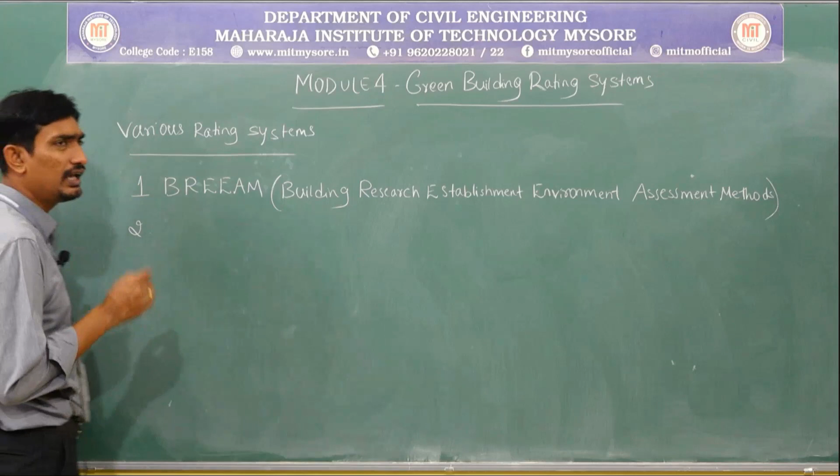Next is the very widely used assessment system in green building, that is LEED. LEED means Leadership in Energy and Environmental Design. So this is the second rating system we are going to follow.

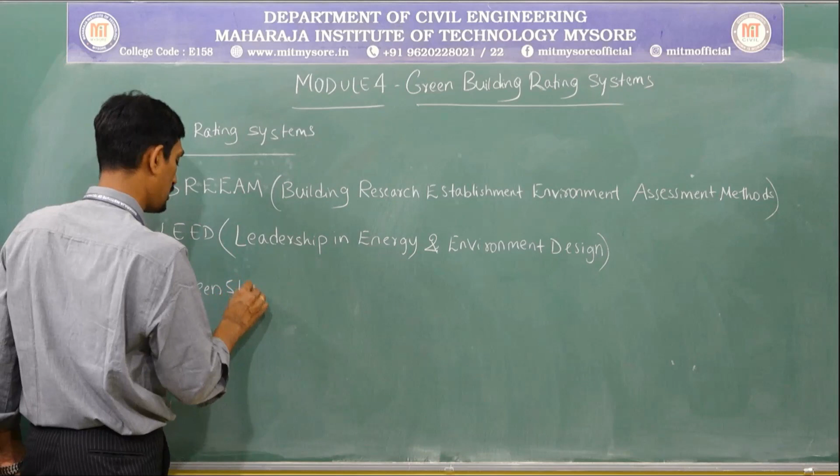Next is Green Star. So this is one more rating system we are going to follow.

These systems are globally used in the green building rating system. Particularly if I come to the Indian context, the rating system used is IGBC, that is Indian Green Building Council. This is the popularly used assessment method in India, and so many strategies and categories have been derived from LEED.

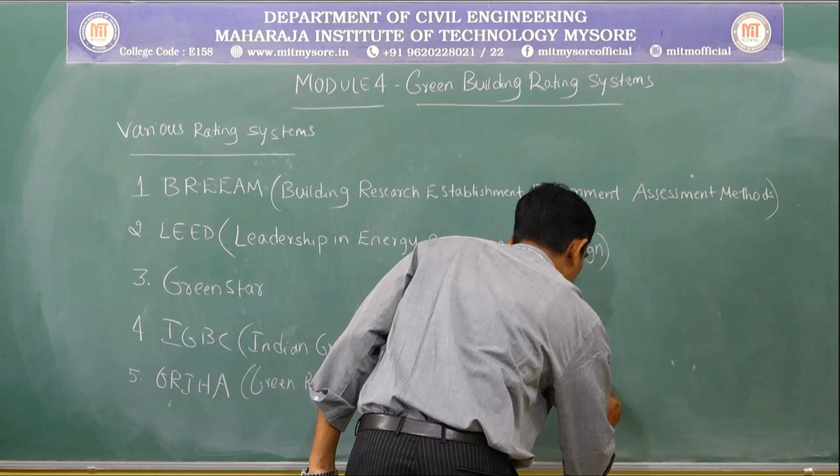The next one is GRIHA, one more widely used assessment, that is Green Rating for Integrated Habitat Assessment. So these are the systems we are going to discuss.

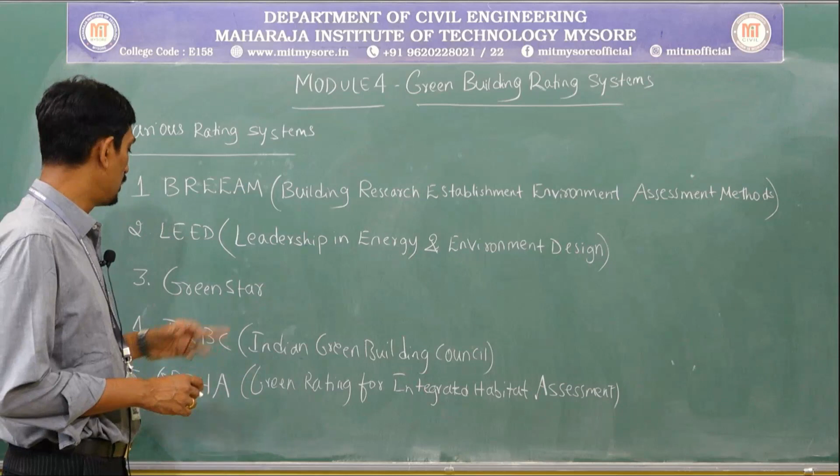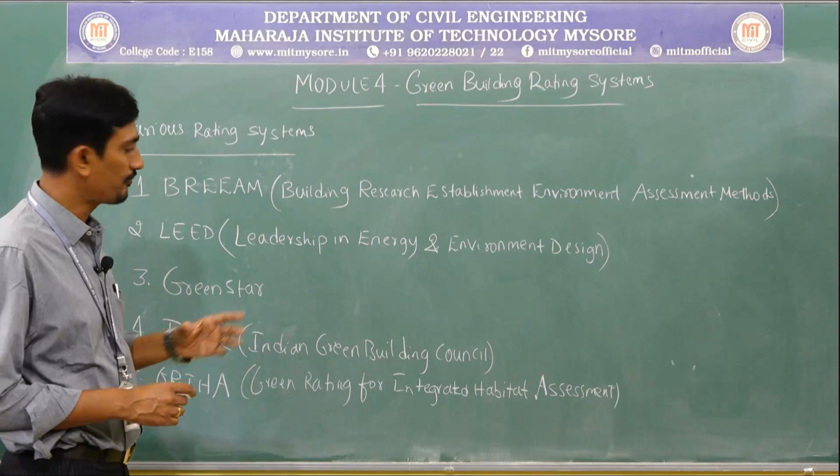The first one is BREEAM, that is Building Research Establishment Environment Assessment Methods. The next is LEED, very popularly used globally, in most countries - Leadership in Energy and Environmental Design, the second rating system. And the third rating system is Green Star, used in some typical countries. So these three are used globally.

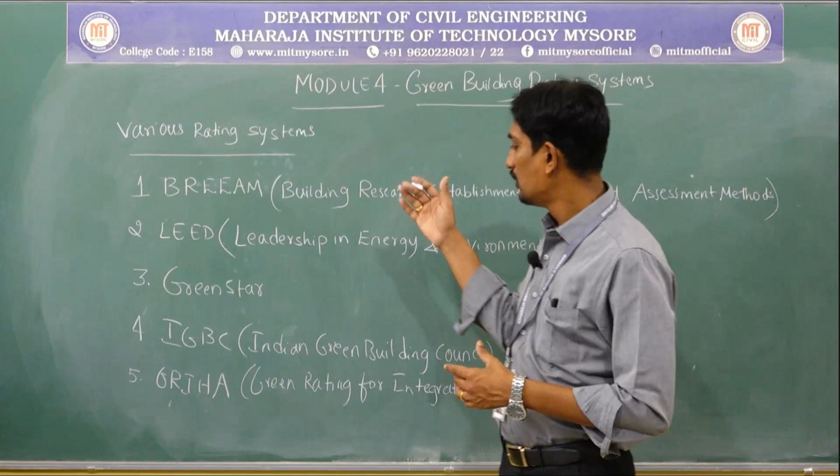Coming to the Indian context, the widely used green building rating system is Indian Green Building Council, that is IGBC. Apart from this, the one more rating system we are going to use is Green Rating for Integrated Habitat Assessment, GRIHA. So these are the five rating systems I am going to discuss.

In this section we will start one by one, discussing the principles followed by each rating system. Apart from these five rating systems, there are other systems used in other countries, like CASBEE. This is one rating system used in some other country. In Japan also they use some other standards, Japan standards. So like this, various countries have adopted various rating systems.

The categories used to classify and rate green buildings also slightly change from one rating system to another. But in general, all the rating systems follow the same categories - water efficiency, energy efficiency, ecology, environment, waste management, and so on. But they have been bifurcated with respect to their countries so that they can rate the green building accordingly.

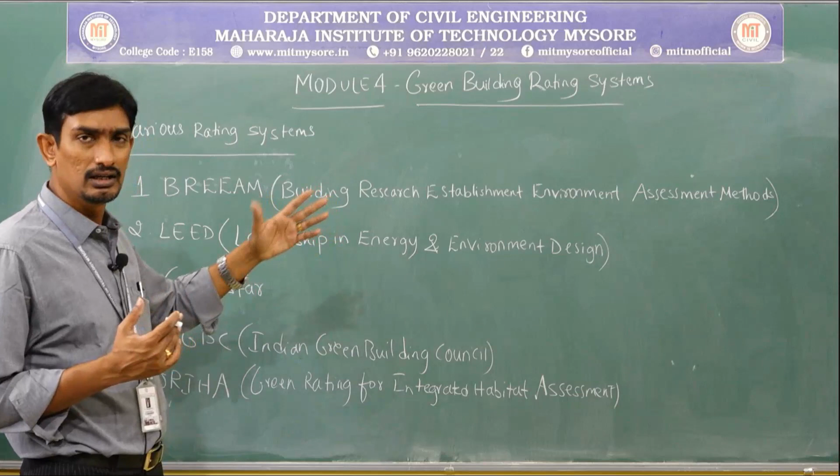So we will discuss one by one what rating systems or categories they follow in the case of BREEAM, LEED, Green Star, and IGBC. We will discuss the categories and also how they are going to rate the green building. So these are the rating systems. Now let us discuss one by one, starting with the first one.

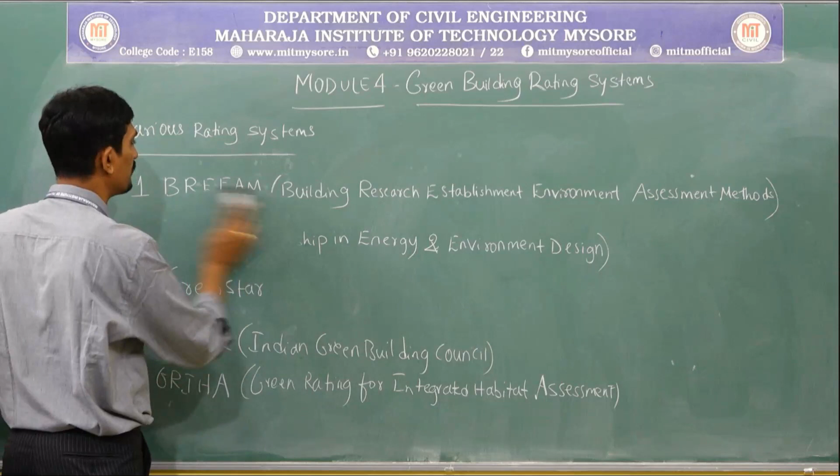The first rating system which I am going to discuss now is BREEAM. This BREEAM was launched in 1990 by BRE, which means Building Research Establishment. They have adopted this rating system.

This BREEAM is a world leading and multidisciplinary building science organization.

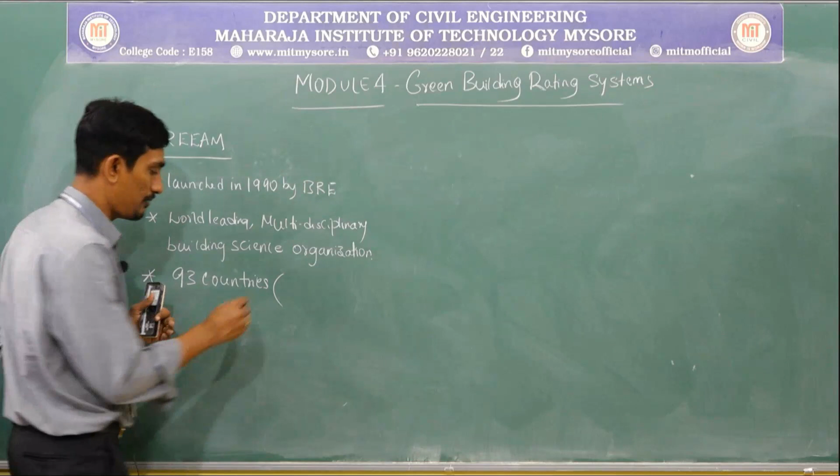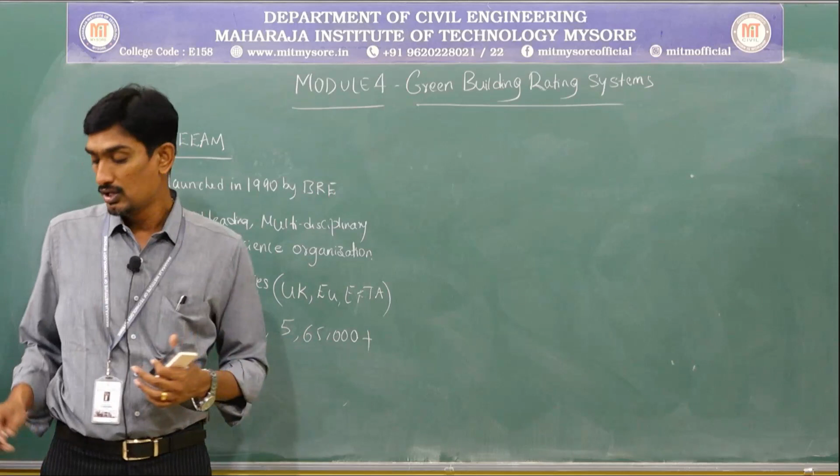Almost I can say this BREEAM has rated 23,26,200 projects till today, since 1990, when they started evaluating or rating buildings. They have certified 5,65,000 plus certifications. This is the amount of certification they have done.

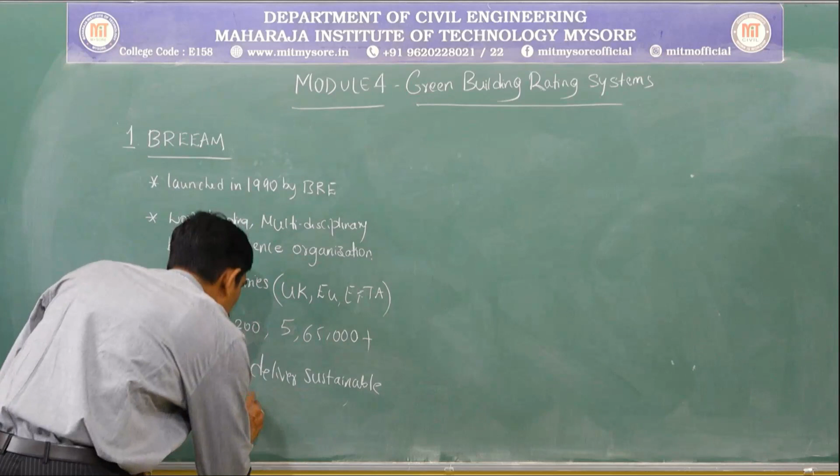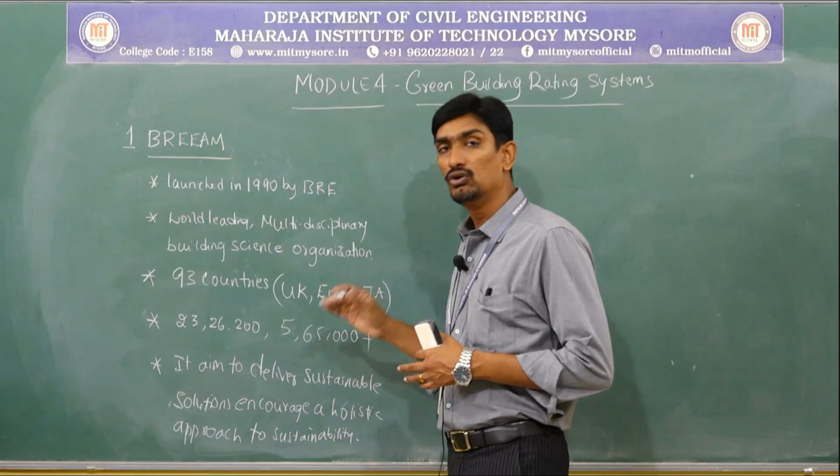Next, what exactly does BREEAM do? It aims to deliver sustainable solutions and encourage a holistic approach to sustainability, or sustainable environment. That means BREEAM provides sustainable solutions which encourage a holistic approach to sustainability, meaning creating a sustainable environment.

When I create a sustainable environment in the building, automatically I can attain the green building concepts, and in turn I can rate or certify the green building in a better manner. So this is the brief introduction about BREEAM.

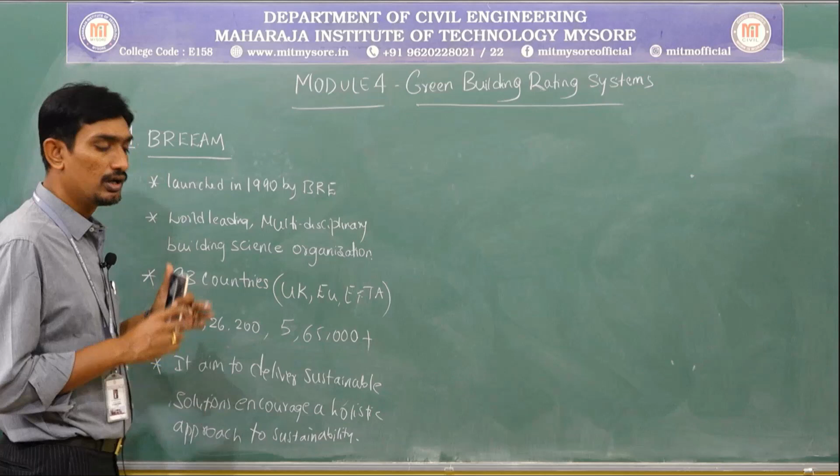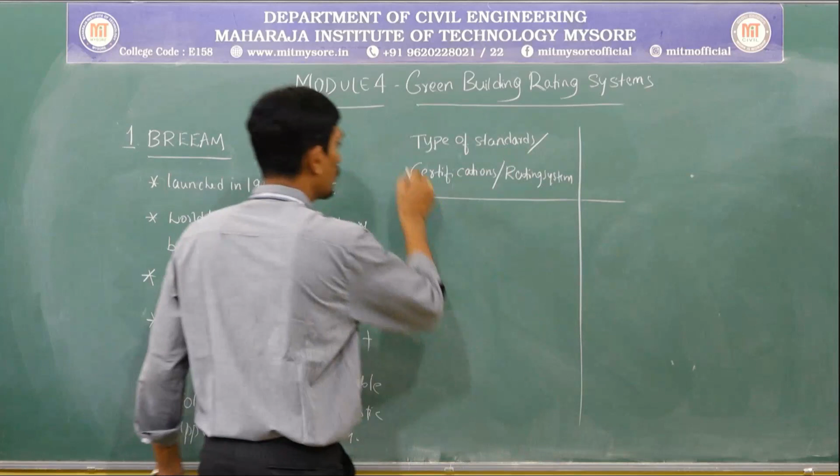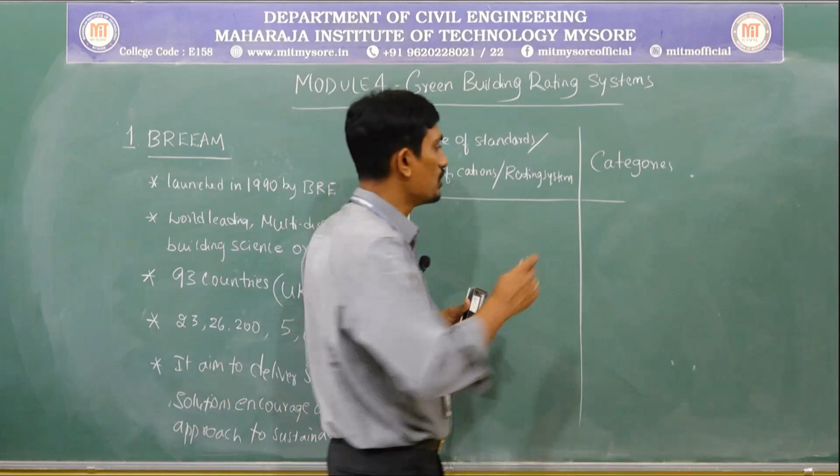Next, categories - this is very, very important. What are all the categories, or the criteria discussed in the last session, multi-criteria assessment or single attributes, categories, various levels. So what are the categories I am going to look at in order to certify the green building?

Next, certification levels. What are the various certification levels? Usually the type of standards or certification/rating systems we are going to do are: new constructions, new communities, the communities, in-use building, eco homes, retails, then courts.

Education, healthcare, offices, even prisons also - that means the jail. Whatever the prisons, they are going to do the assessment. What I am trying to say here is everywhere we are looking into the concept of sustainable environment, meaning we are looking forward to creating a sustainable environment. So in that perspective, these are the various levels we are going to look at.

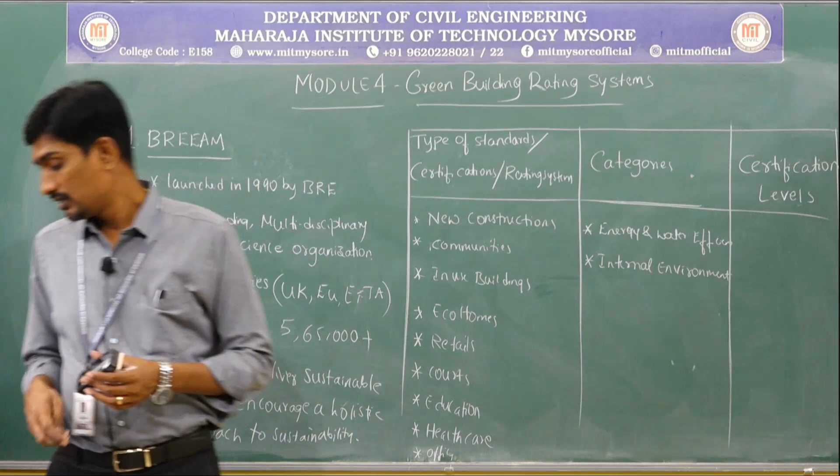Health and well-being. Next, pollution in terms, that is whether the building is creating pollution. Next, transport, that is also one of the criteria.

Next, materials. This is a very important thing we need to look into, that is whatever materials we are going to use in order to construct the building. That plays a very important role, because the better the material, if we use eco-friendly materials as stated in the last session, it will create a sustainable environment. In turn, we can attain the green building concepts in the buildings.

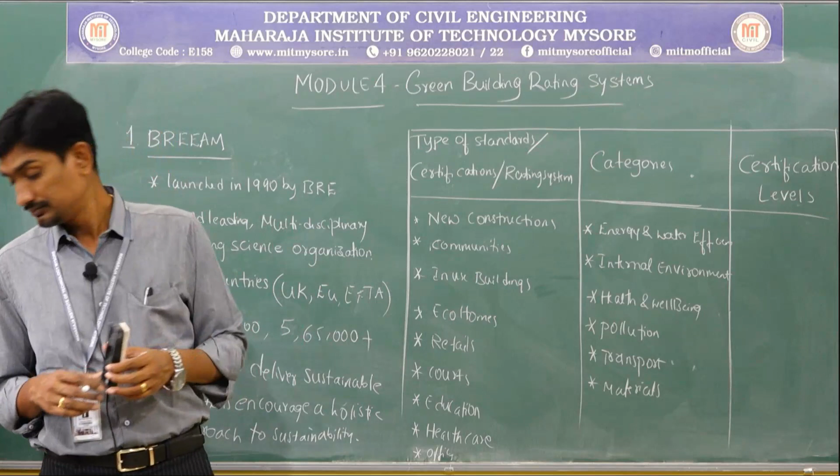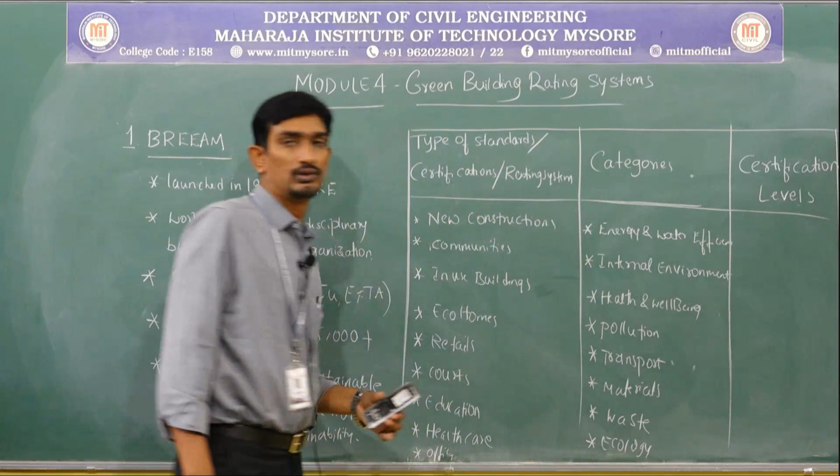Next, waste, ecology, and land use. In the last class I also stated how exactly you are going to create the boundary for the building. For example, if there is any tree on the periphery of the building, it will try to protect the heat inside the building so that you can feel comfort inside. And how exactly you have oriented the building, that means the plan. So that is ecology and land use.

So these are the various categories I am going to look at with respect to these buildings, whether new construction, communities in use, or the building that will be used - eco-homes, retail, courts, education, healthcare. In all these buildings I am going to look at these categories. If all these categories are met, then the certification level will be better.

If they are going to meet certain standards, the certification level will keep reducing accordingly. The certification level they are going to start with, the very basic level, is pass. So they are going to certify it with just - if you attain the criteria of some categories, then you are going to certify it with pass level.

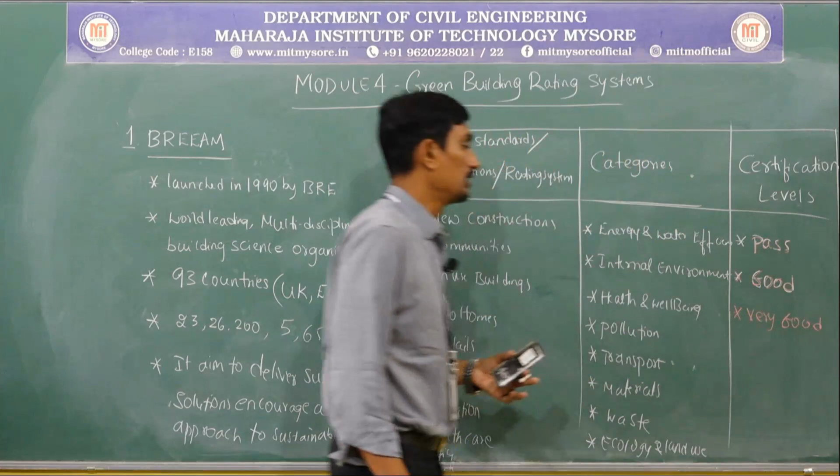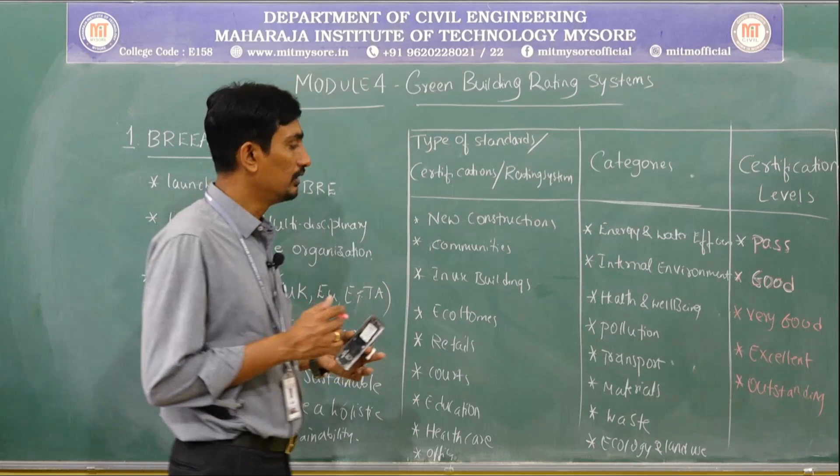Next, if still something better, then excellent. If something better than that, then outstanding. So these are the various certification levels I am going to provide with respect to BREEAM for this building, with respect to these categories.

So with respect to these categories, I am going to certify this building with this certification level in terms of BREEAM. BRE is the agency that has developed this table globally, that is the Building Research Establishment. This particular organization has developed it like this.

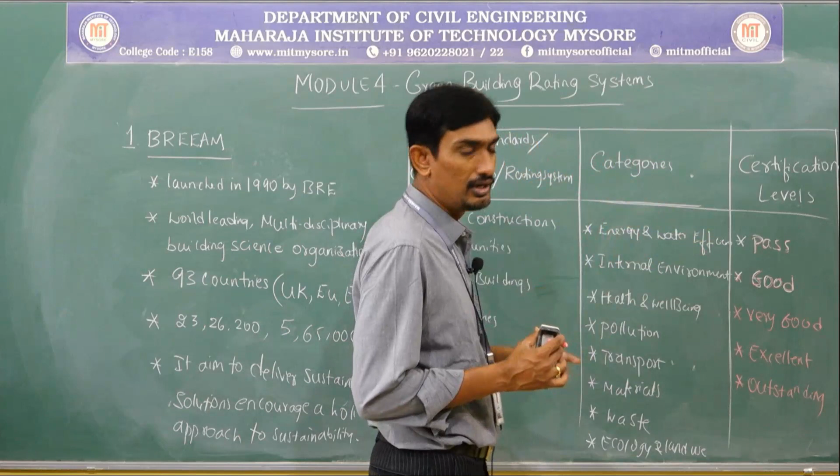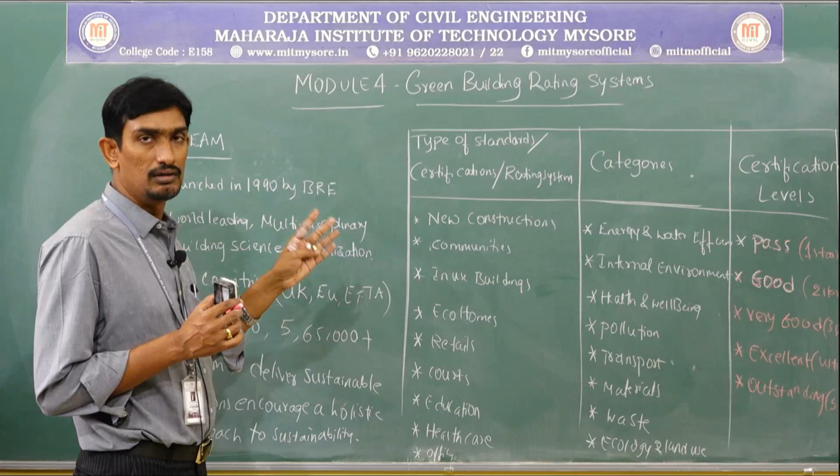Sometimes they are also going to star the certification level, like 1 star, 2 star, 3 star, 4 stars and 5 stars. Like this they are going to certify the buildings based on the BREEAM certification level. Hope the categories, the certification level, and what things I am going to certify has been clear. So this is about BREEAM.

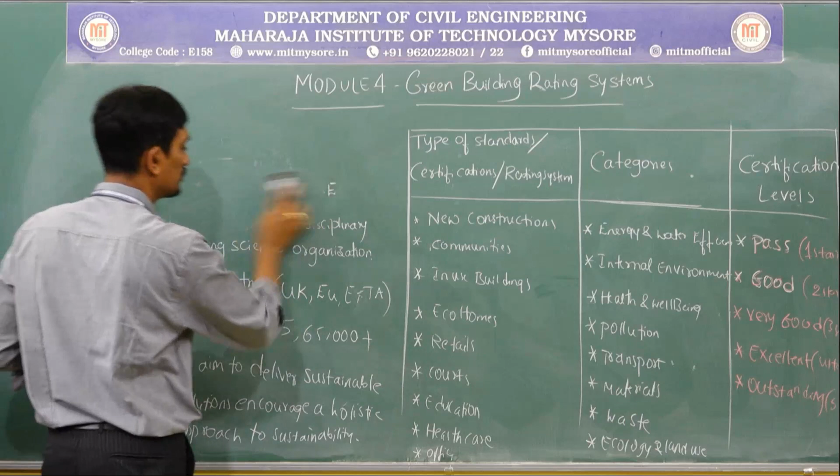Is it clear? Next, we will move on to the next rating system. The next rating system is LEED.

This is the second rating system very widely used globally. Many countries follow it. Even India follows this LEED, they have modified certain things and are using this rating system. That is Leadership in Energy and Environmental Design - that is what LEED stands for.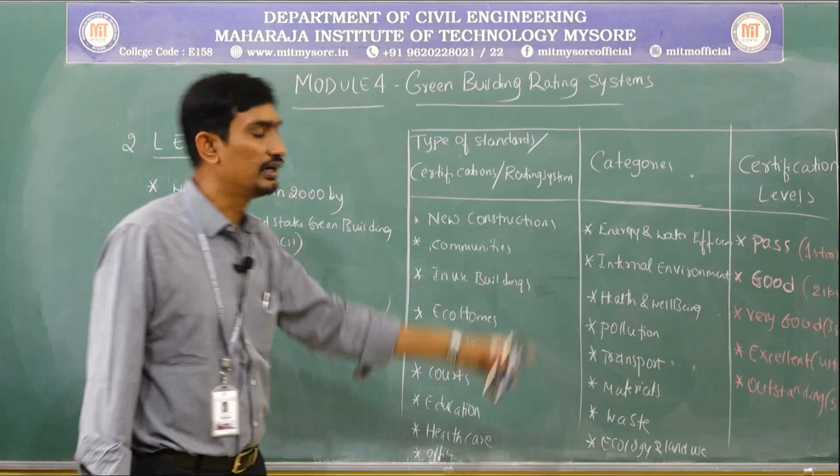This was established in 2000 by USGBC, that is United States Green Building Council. So the United States Green Building Council has developed these standards, the LEED rating system.

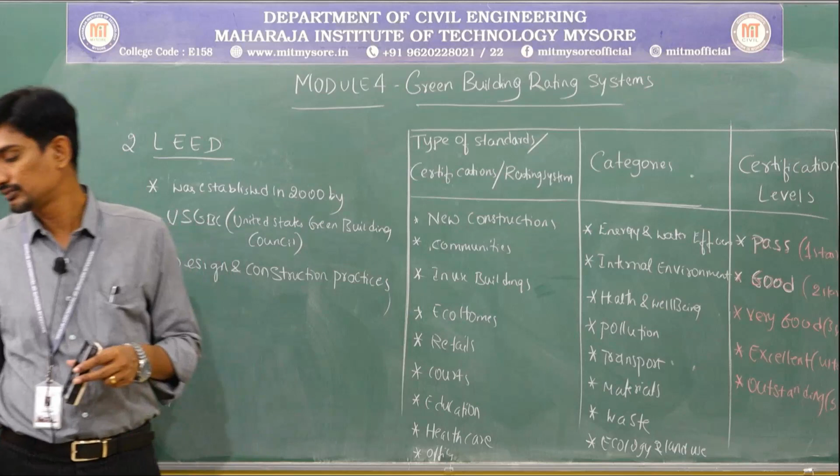Next, what exactly does this USGBC do? This USGBC rates design and construction practices that continue to define green buildings.

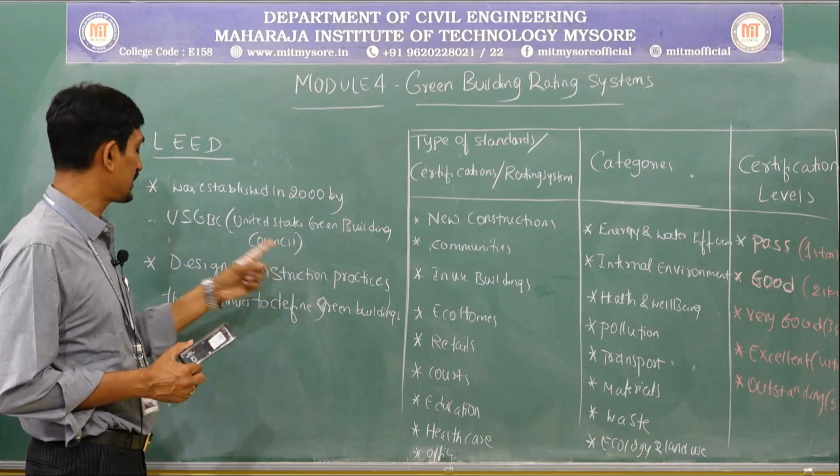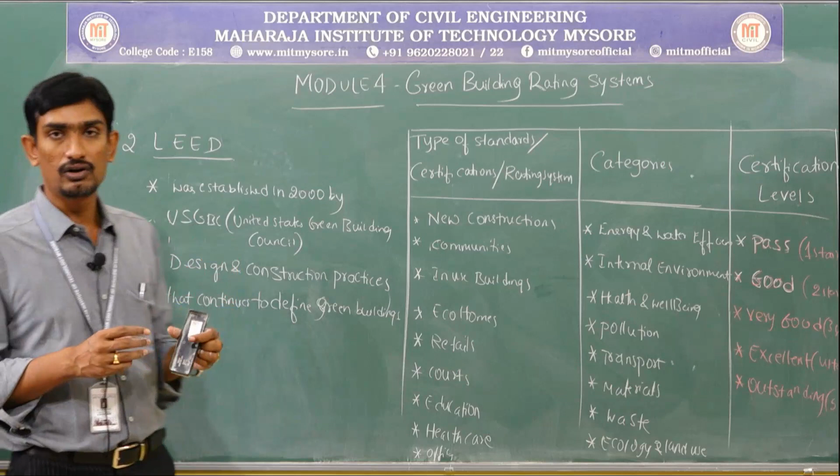This LEED, developed by USGBC, is used to rate design and construction practices that define green building. That means how exactly the design of buildings has been done to meet sustainable environment requirements in order to certify as green building, and how construction practices have been followed or adopted to create sustainable environment to meet green building standards. This is the way USGBC or LEED operates.

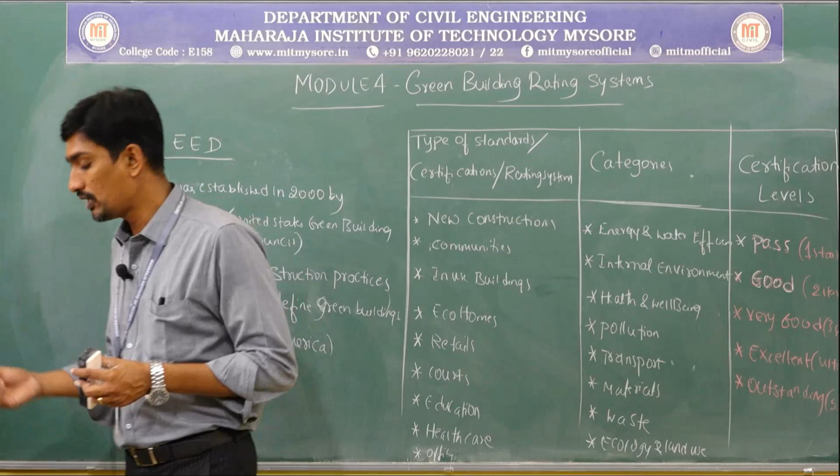This particular LEED is majorly used in the USA, particularly in North America. The USA developed this LEED with respect to the US Green Building Council, and almost 150 countries have adopted this LEED, including India.

India has also derived this LEED certification, and whatever IGBC I am going to discuss next, all those certified systems or rating systems have been derived from LEED, which was developed by USGBC, that is US Green Building Council.

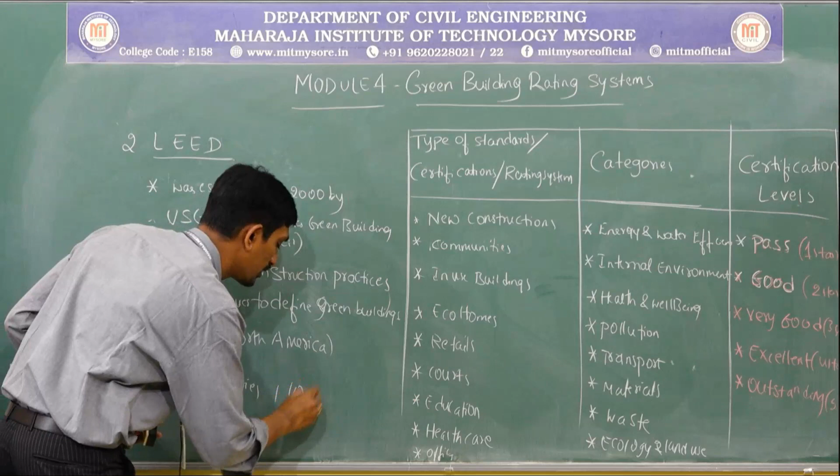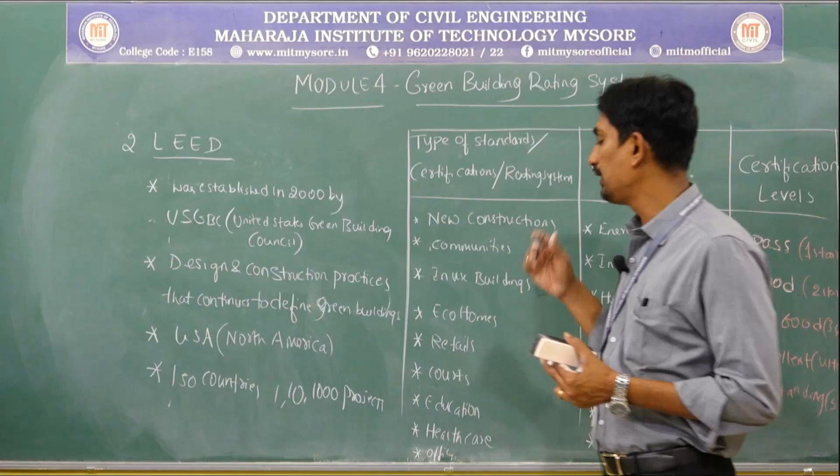150 countries follow this. Practically, almost 1,10,000 projects have been certified with this LEED certification, especially by USGBC.

One more important thing I can state here is, from the latest research, almost $130 million have been kept by USGBC or USA in the budget for this LEED certification.

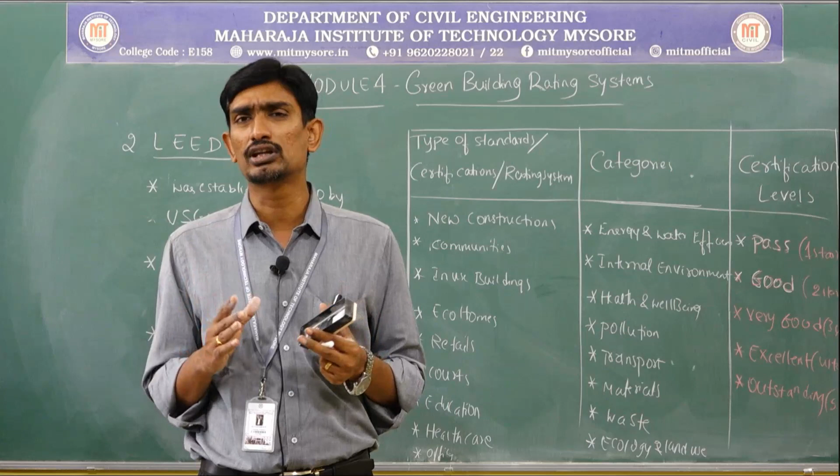Nowadays everyone is looking at the perspective of how to reduce global warming, how to reduce carbon emission issues. So everyone is going with the carbon footprint. With this carbon footprint or global warming reduction perspective, how do I need to go with my design practices, how do I need to go with my construction practices as per the LEED certification. So it is a very prestigious thing for a building to get a reward from the government.

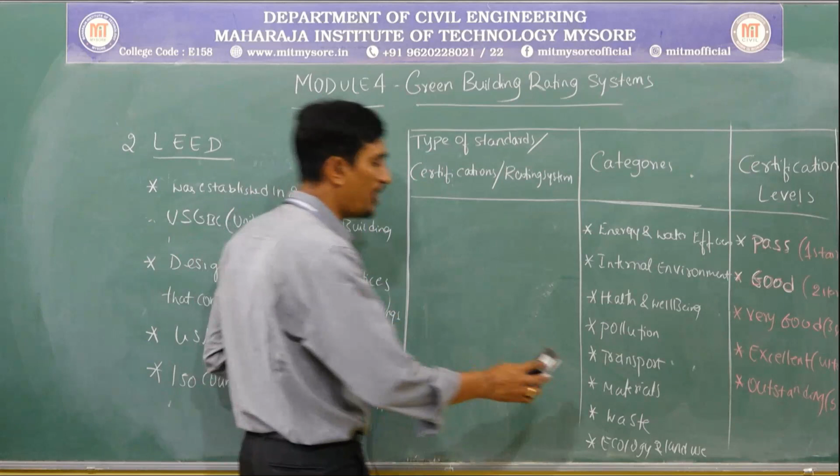So this is a small introduction about LEED. Now let us go with what are the types of standards or certification or rating systems followed by the US Green Building Council, or LEED, and also the various attributes or categories and certification levels with respect to LEED. This goes back to what was stated in the earlier class, in this session also. The rating system, categories, everything is almost in general the same, but they have been classified with respect to their rating system, meaning a little modification has been done.

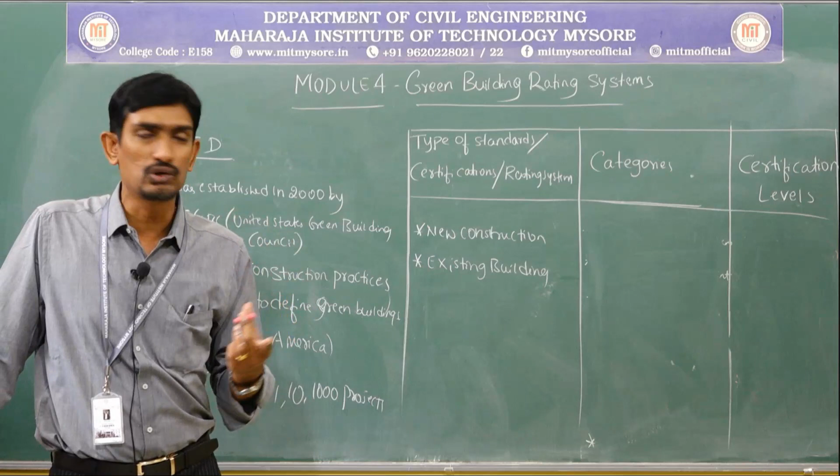For example, here also the same thing, new construction, one and the same. Earlier in BREEAM they used to call it in-use buildings. Now they are going to call it existing building. A slight modification, that's it - new construction and already constructed building. But in BREEAM they were using a terminology called in-use building. That's the modification, but the meaning is one and the same.

Next, commercial buildings, or commercial interiors, schools - one and the same. Here also retails. Next, healthcare, same thing. Retails, healthcare, homes - instead of residential building, they used to call it homes. Neighborhood also counts here - how exactly has the neighborhood been created?

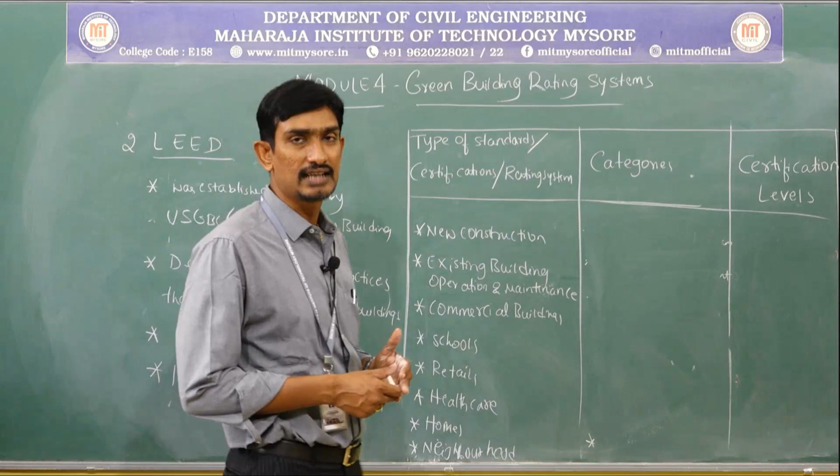And actually in existing building, we are going to check - the main thing is operation and maintenance. So type of standards in this category, LEED has been classified into new construction, existing building (that is with operation and maintenance), commercial interiors or buildings, schools, retails, healthcare, homes, and neighborhood.

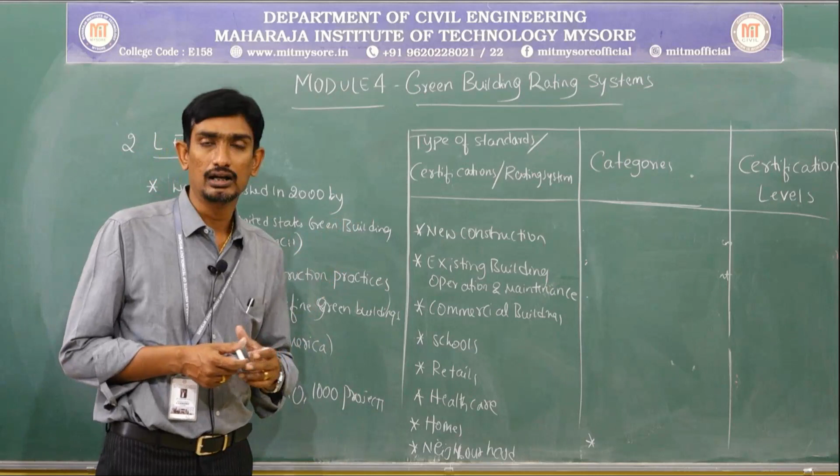These are the various standards, or certification or rating systems, followed by LEED. Next, coming to the categories, or attributes, or levels, or categories by which I am going to do the certification. So the first category is sustainable sites - whether the boundary in which I am going to construct the building is sustainable or not. That is the first perspective or category I look at in order to do the certification as per LEED.

This is what was stated in session 1 also, that is planning. In the planning stage, from the inception itself, we need to create the sustainable environment. That is the sustainable sites category which I look at in LEED certification - when I start the assessment from the plan itself, how exactly has the building been constructed with respect to sustainable sites. The second category is the same, that is water efficiency.

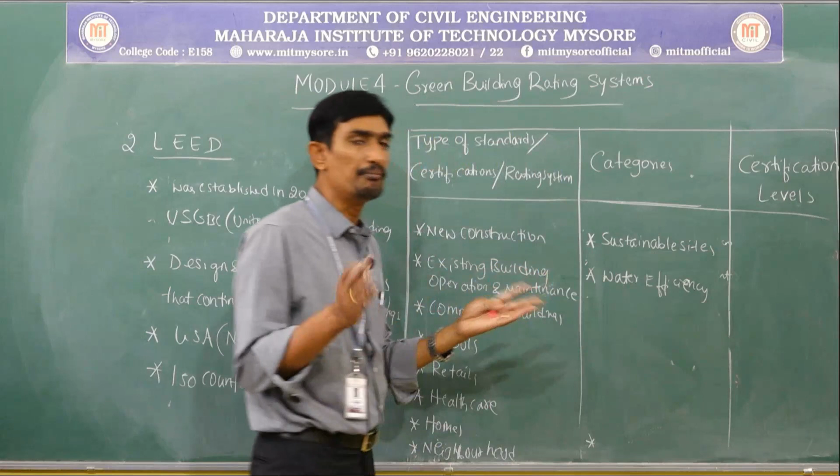Water efficiency - in BREEAM, water and energy have been combined, but here they are discretized separately: water efficiency separate, and energy and atmosphere separate. This is a slight modification. Energy and atmosphere is the third category.

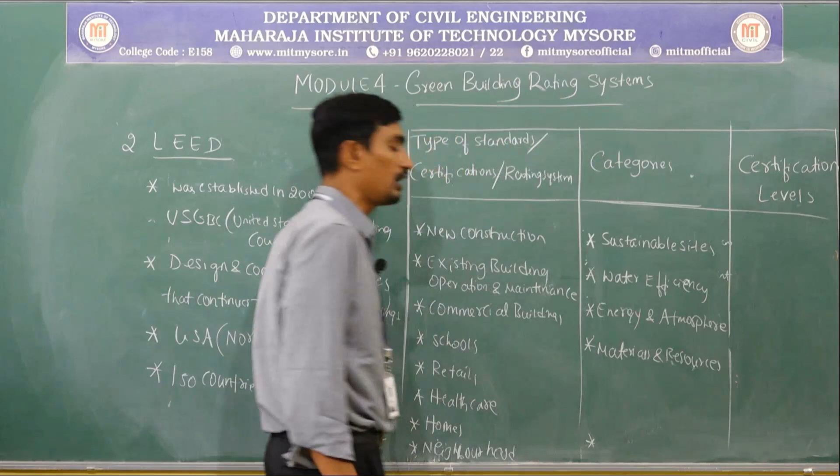Next is materials and resources, very important. I think BREEAM also states this - what types of eco-friendly materials am I using, whether I am using carbon-rated materials. For example, concrete and cement - if I use more ordinary Portland cement or more concrete, the carbon level will be more, because concrete and cement have higher carbon content, so the energy efficiency level will be brought down. So material-wise we need to be conscious about what material is being used and which methodology is being used.

For example, instead of using concrete blocks or bricks, as you've read in module 2, a very eco-friendly material is stabilized mud blocks. But people don't have confidence to use it. We need to create awareness amongst people about the situations where we should go ahead with this. If you go with this perspective, only then can we attain a sustainable environment or reduce global warming. Otherwise it is very tough to live.

I hope you have observed these days, because of this, major climatic changes are happening. Newspapers write about the increasing amount of climatic changes or variations - in winter season you feel summer, in summer season you feel the rainy season. These climatic variations are happening because of global warming, which is due to enormous liberation of carbon into the atmosphere, deforestation, and all these things. With this context we need to modify the perspective of our thoughts and go toward creating a sustainable environment.

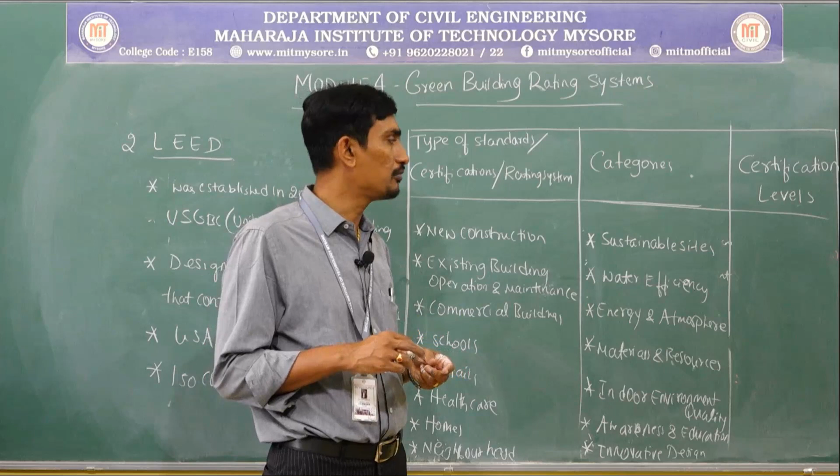Next, regional priority—that is one more category which I am going to look at in LEED. So these are the various categories I am going to look at.

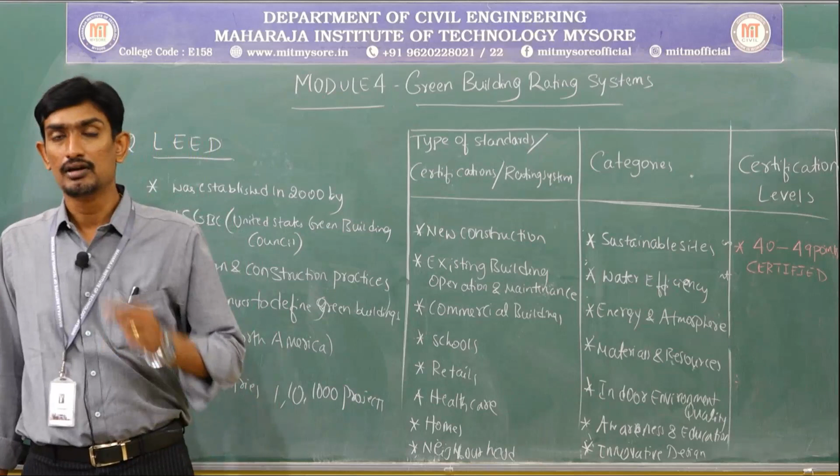Next, coming to the certification level. If I attain a score of 40 to 49 points out of 100, then I can say the building is certified with green building. This is the first basic certification level, just like a pass in the system.

Next, if I attain 50 to 59 points, then I will get silver. If I get 60 to almost 79 points, then I can say I have attained gold.

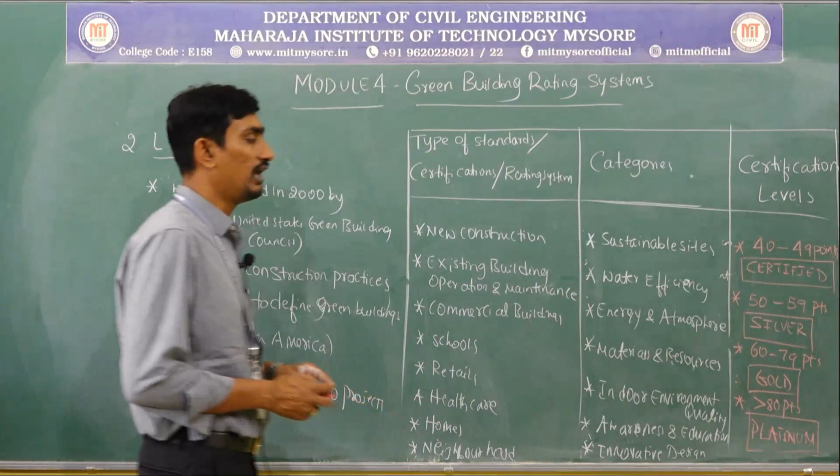If the points are more than 80, then the certification level will be platinum. This is the usual rating system, even followed in India—silver rating, gold rating, platinum rating. So these are the various certification levels. LEED certifies based on these standards or systems, based on these categories.

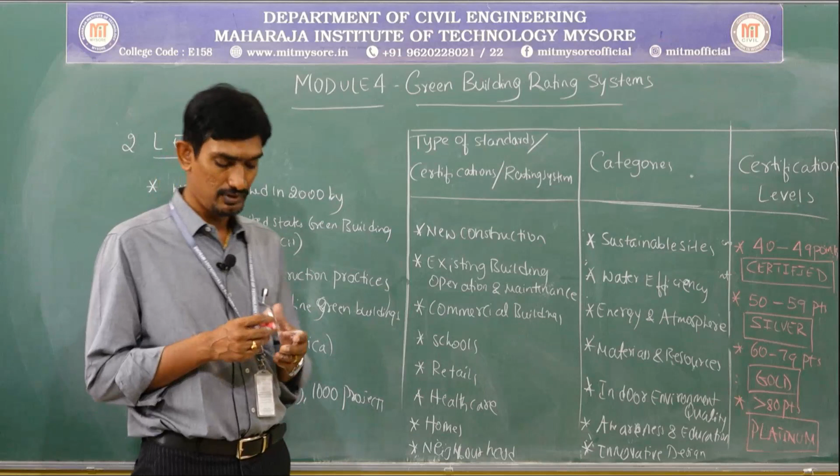Hope you understood the categories, the type of standards, the certification levels. Even in India, IGBC almost follows the same certification level, which I am going to discuss next. Hope the concept has been cleared in LEED, that is Leadership in Energy and Environmental Design. So we'll move on to the next certification level or rating system.

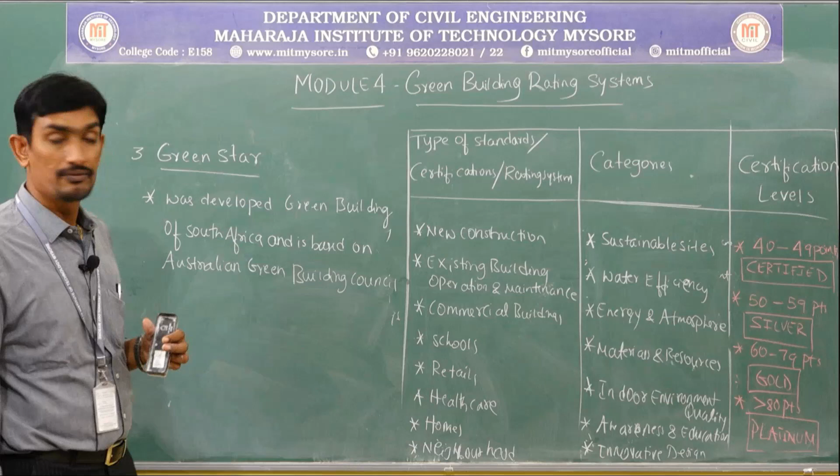The next is Green Star. This was developed by Green Building of South Africa. In South Africa, or African countries, they used to follow this. This South African green building council is based on the Australian Green Building Council.

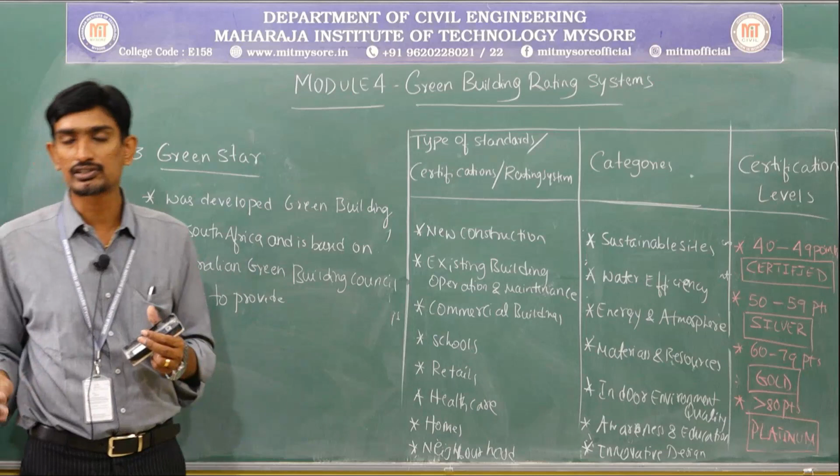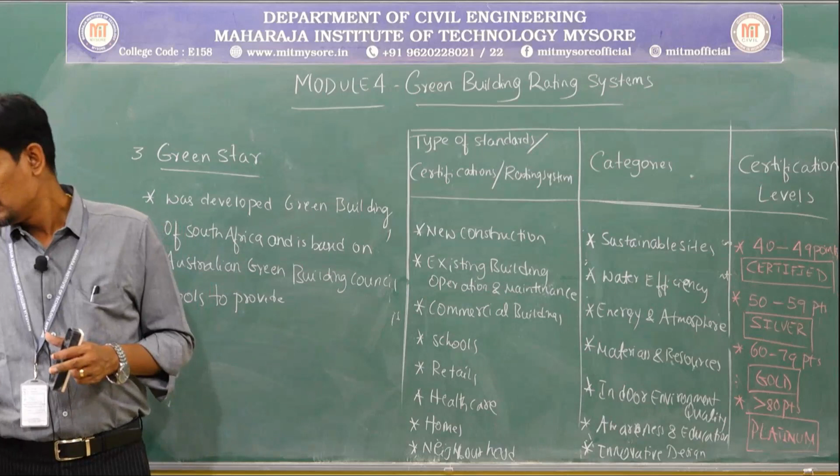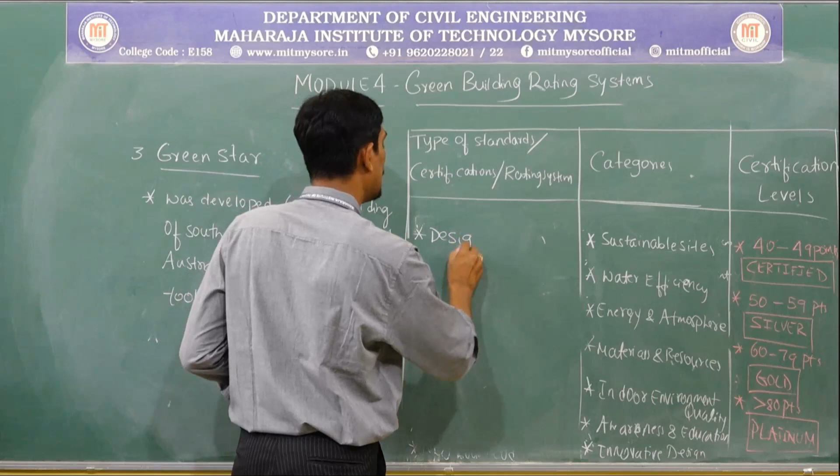Now coming to the type of standards or certifications. The first is design and built environment. This Green Star was developed by African countries—South Africa, Australia, New Zealand—and almost all these countries follow this Green Star certification to certify green buildings.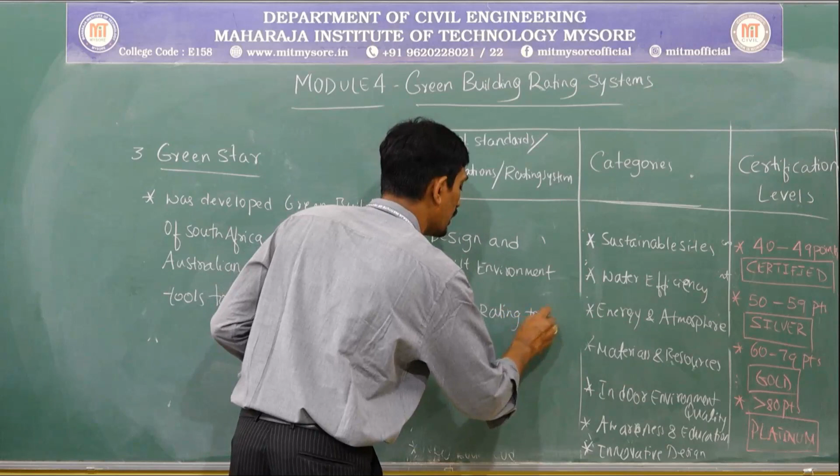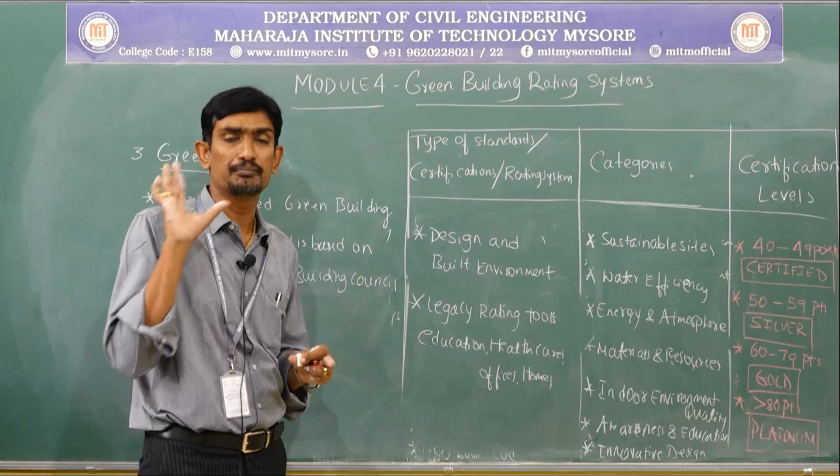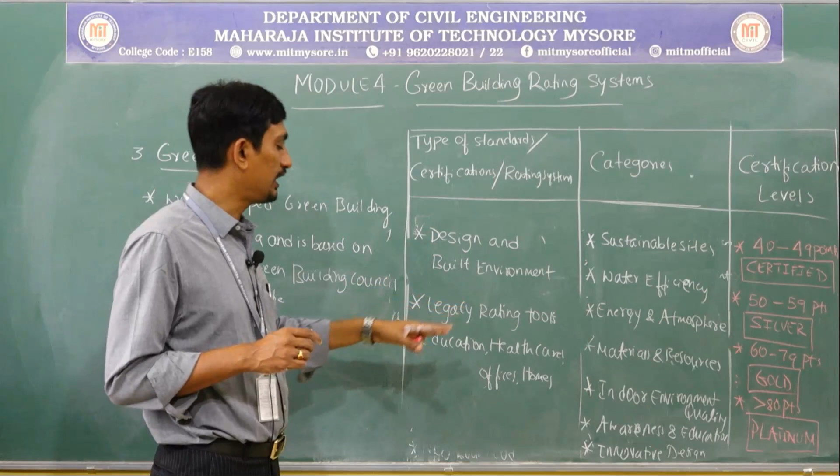The next thing is legacy rating tools, which provide priority to the property industries such as education, healthcare, schools, offices, and homes. So these are the two types of standards, classified into simple categories: one is how exactly the building has been designed and built to create a sustainable environment, and the other is legacy rating tools with respect to property standards—education, healthcare, offices, homes, etc. Now coming to the categories.

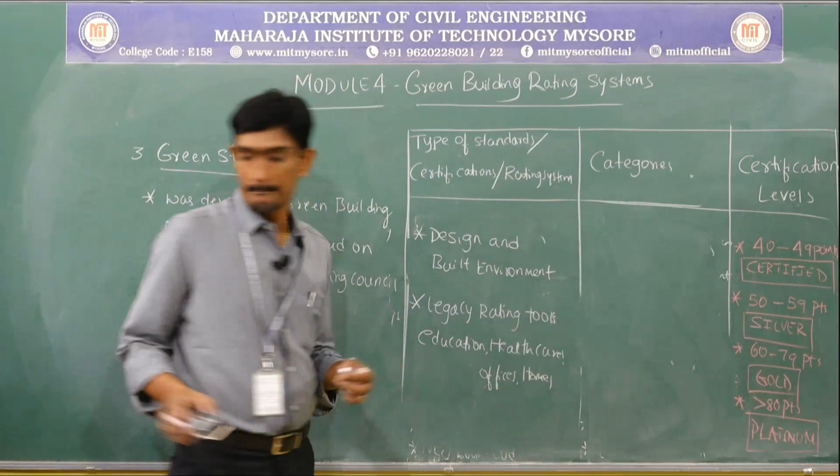The categories are, the first thing is management. They have been generalized, not said as waste management, water management or energy specifically, but just generalized management. That means management of water and energy, both the things. Next, indoor environmental quality.

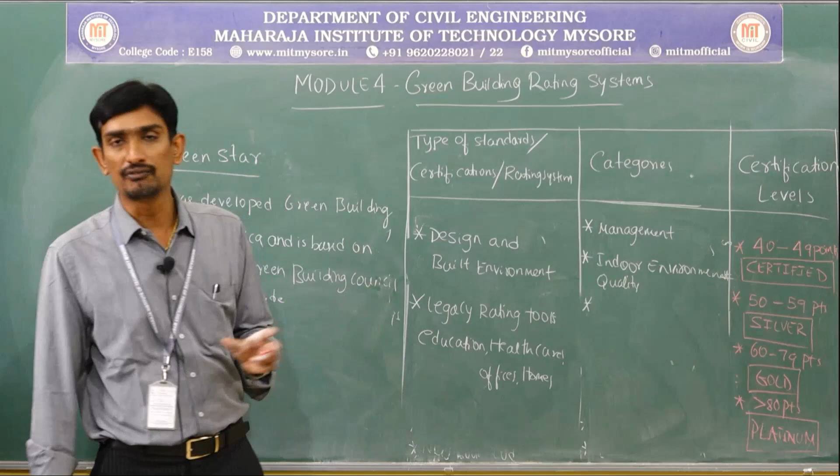Indoor environmental quality, the same thing we discussed in LEED will be followed here also. Next, energy. Now energy has been separately categorized here. The water management, waste management, and energy are separate - energy efficiency or energy.

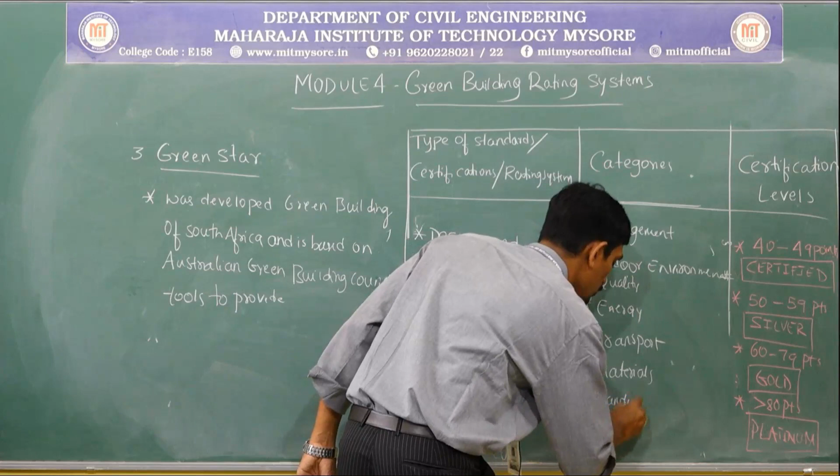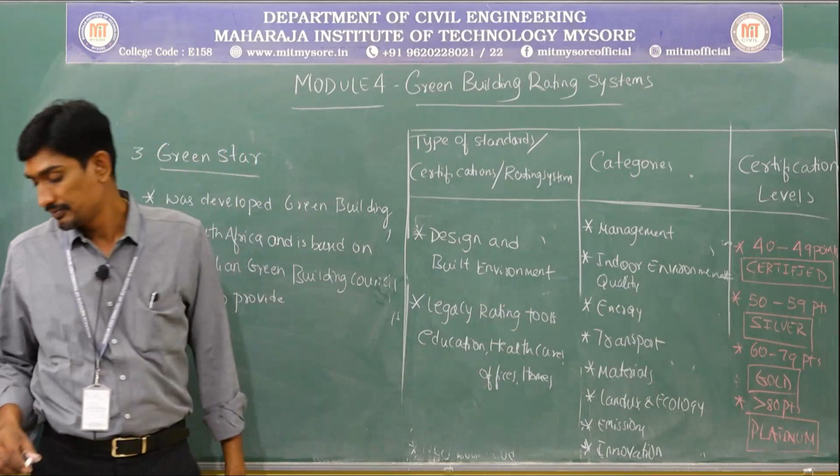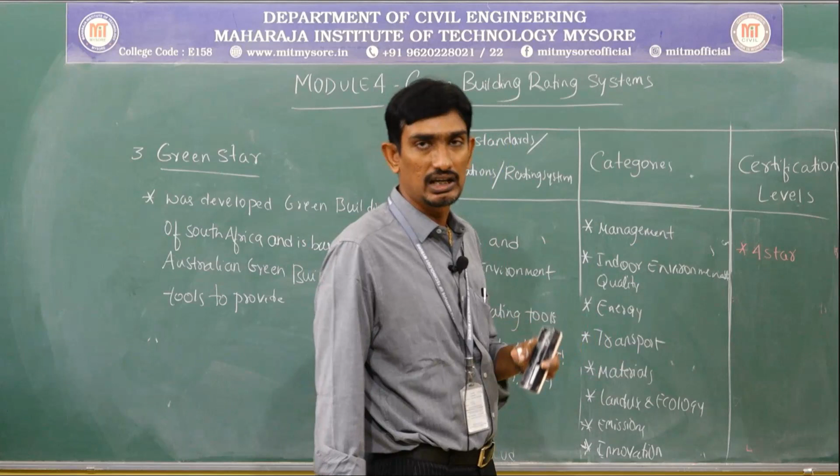Now coming to the certification levels. The certification levels are very simple: 4-star, that is the basic level certification given by Green Star, that's why the name star. Next, 5-star green building, the next level. The next is 6-star. So these are the various levels of certification followed by Green Star in order to certify these standards.

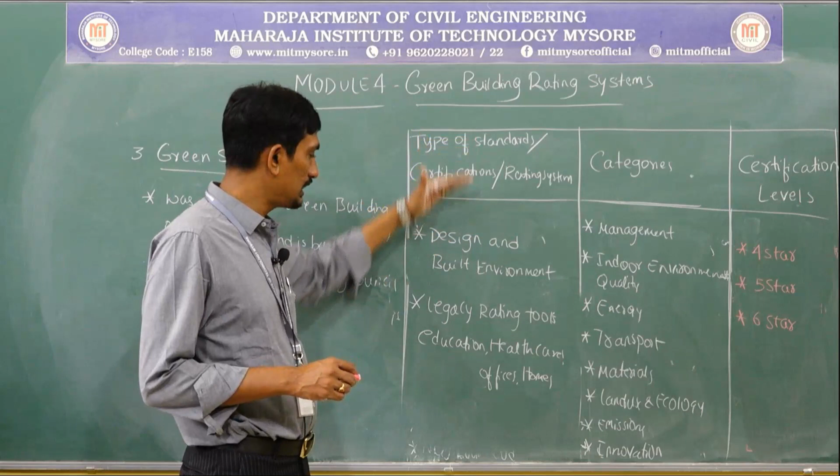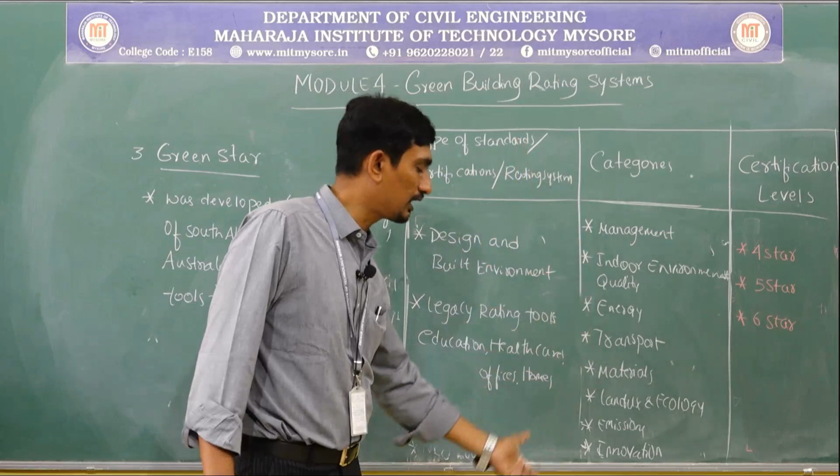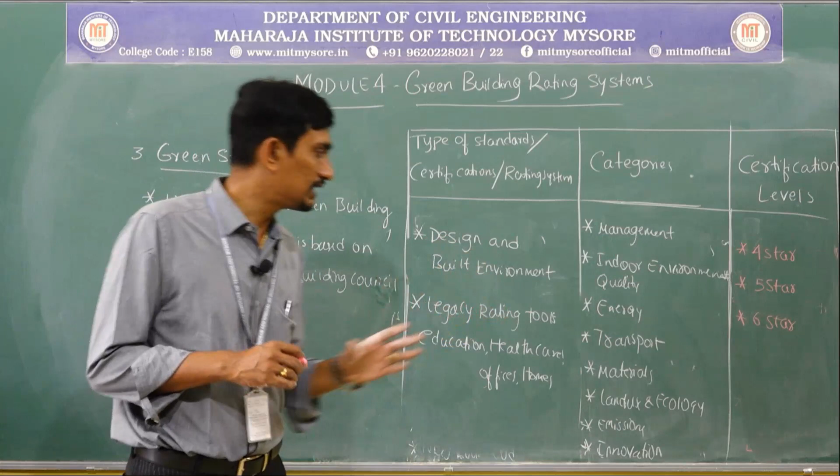With respect to these categories - management, indoor environmental quality, energy, water, transport, materials, land use ecology, emissions, innovations - these are all the various strategies I am going to look at with respect to education buildings, healthcare, hospitals, offices, residential buildings, whatever it may be. If a building abides by all these categories, I will certify it with 6-star. If something is missing, 5-star. If many things are missing, I will go with 4-star, depending upon the certification levels.

So this is the certification system followed with respect to Green Star, which was developed in South Africa Green Building Council, based on Australian Green Building Council. I think it will be followed by New Zealand also, and most of the African countries. So these are the 3 rating systems that will be followed globally.

Today I have discussed - first I started with BREEAM certification, popularly followed in UK, European Union and so many countries. Later I moved with LEED, which is popularly used throughout the world, even in India, developed by USGBC. The third one is Green Star, developed by South Africa. So these are the 3 rating systems that will be followed by various countries.

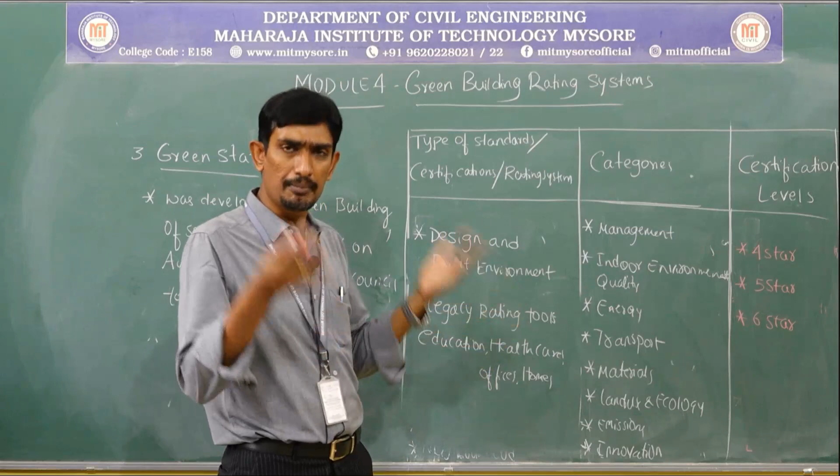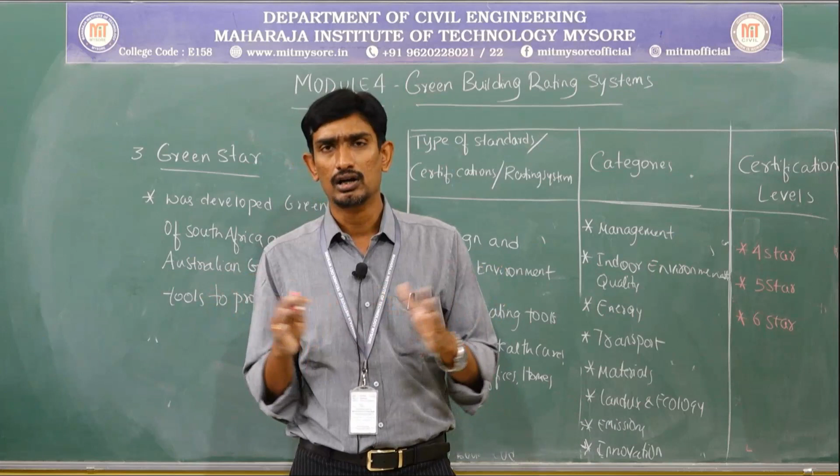Did you get my point? CASBEE standards, Japan standards - those we are not going to discuss in this particular session because of this concise module. In the next session I am going to talk about the rating system with respect to India, where you can also become a certified green building consultant. How exactly you can do that, I am going to tell you in the next session.

Hope this session has clarified the concept discussed in session 1. I said there are different rating systems - these are the 3 different rating systems followed in various countries. In the next session, I am going to talk about the rating system followed in India with respect to the Indian context. Hope the session has clarified and helped you understand the concepts. Thank you very much for listening.